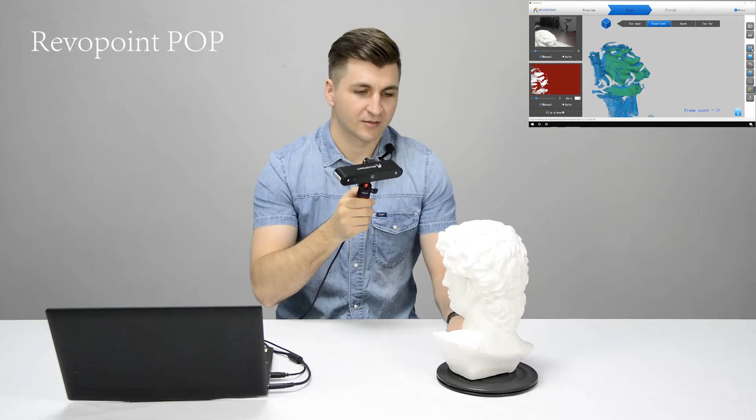So here now I will compare with the POP model from Revopoint, and I will show you how to use it. I find it very easy to use and work with this scanner, because all you need of course is the object and a turning table.

So you hold the scanner in your hands like this, not very close, not very far, just perfect, and you just turn it slowly, manually, and it will catch all the depths, all the edges of the object you need to scan. You can change angles, and also you can check with the computer how you're covering the object, how you scan it.

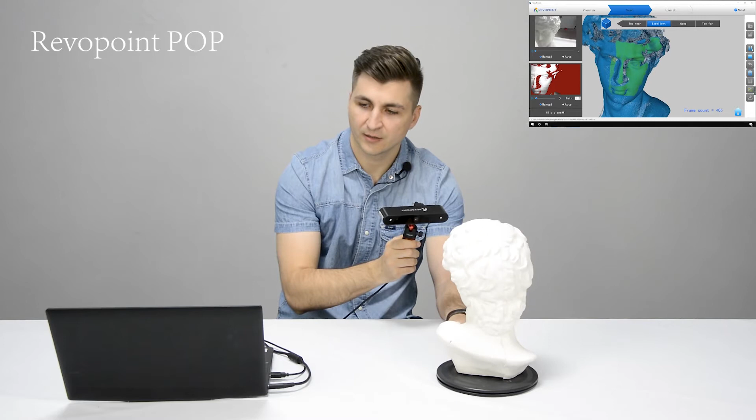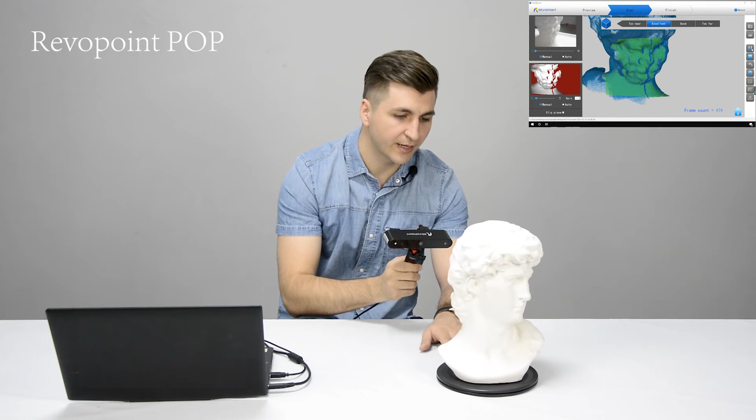And the depth of these scanners is very accurate and very precise. You can see very clearly how well-defined the scanning process is.

In the next part, I'll try to see how well each model can represent the details of my face better. So first, I try to use the Mark II scanner over here, to see how well the wide-angle 3D camera can identify facial features. For this, I couldn't do it myself, so I had to ask a friend to do the scanning for me, and I'll show you the results later.

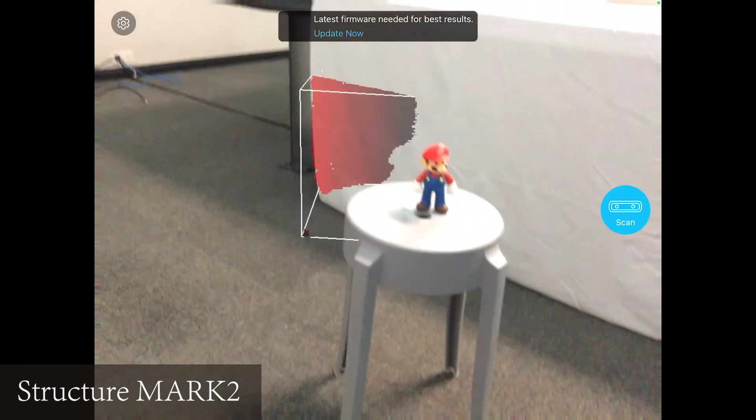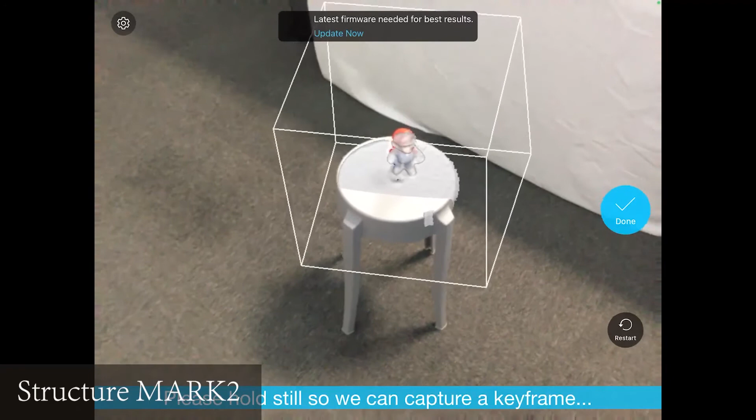Here I try to check the performance of these scanners by scanning a small object, in our case it's Mario. I just put the object on the chair and move around it. It identifies it, and yeah, we can see here the result is not very satisfying. The edges are not very clear, everything is quite soft and smooth.

Here I will show you how easy it is to scan a small object with the RevoPoint Pop 3D scanner. You just place the small object on the turning table and it will be done very soon.

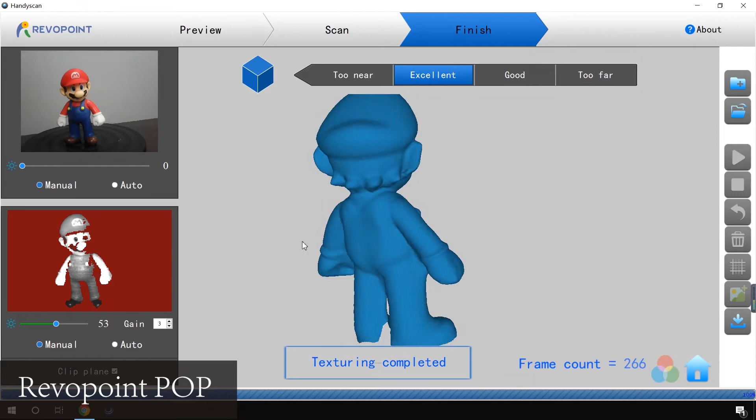For the fourth test, let's see how detailed these scanners can be. I have here a set of playing cards, each 0.25 millimeters thick. Let's find out if these scanners can identify the thickness of the cards placed on a flat surface.

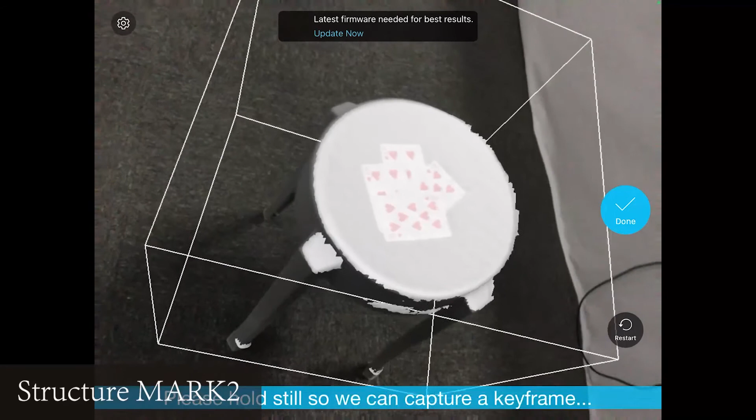Here I will show you how I scan the cards with the Mark II camera. You can see it identifies the object and it's locked, and now you move around it and it will scan. You can see it recognizes the colors, but it's not recognizing the different thickness of the cards on the flat surface. So we'll see how that goes for Pop from RevoPoint.

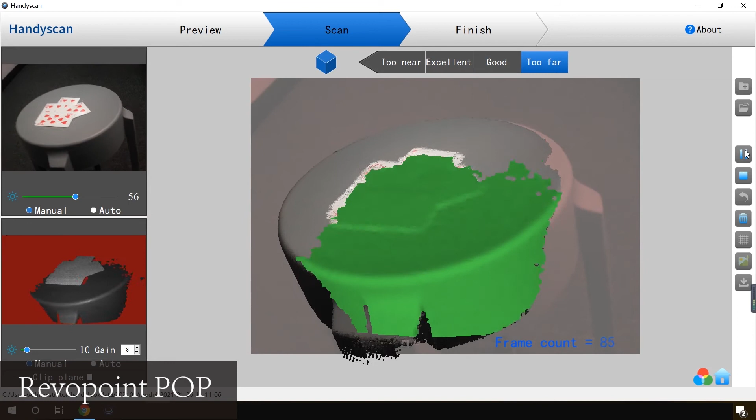Here I can show you how I scan the cards with the RevoPoint Pop 3D camera. You can see it's very easy to scan, you just hold the camera and move around.

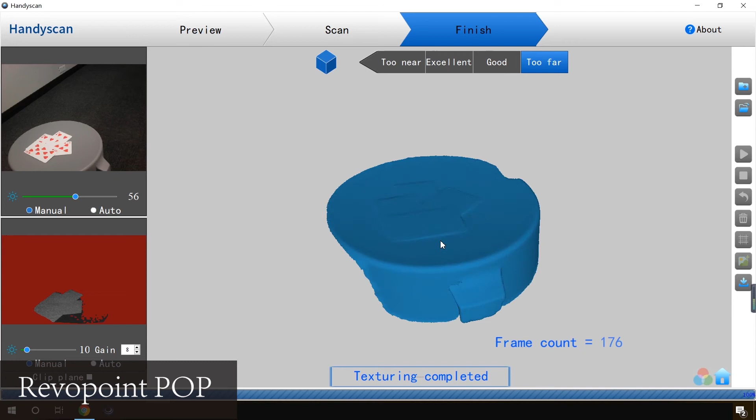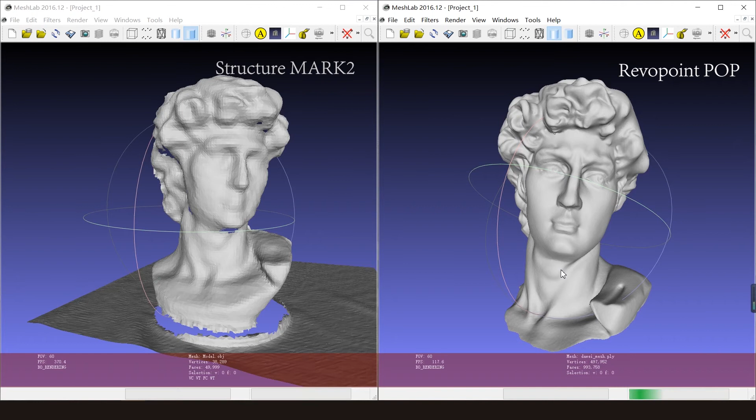So we got the results from both cameras. On the left we have the Mark II result, the 3D model realized with Mark II. We can see the surfaces are quite smooth and the edges are not clear, and you cannot even recognize the facial features. But here on the right we have the 3D model realized with the Pop 3D scanner. You can see very clearly the eyes, the mouth, the shadows, the depth of the object, which is very good.

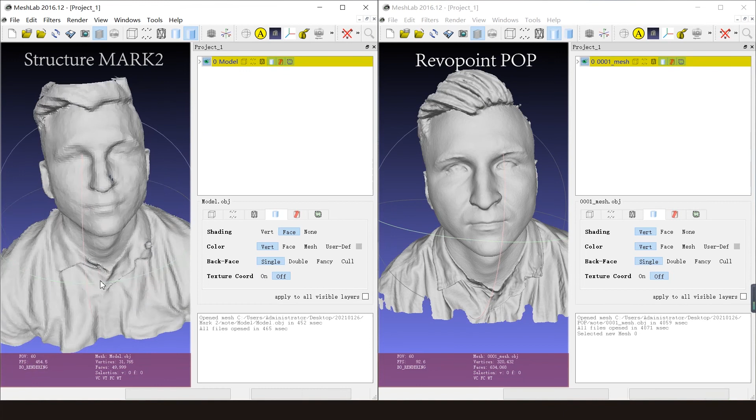We have here the results of the face scan experiment. On the left we have the Mark II. We can see the color is pretty good, and comparing with Pop it's not that bad. Both can recognize colors pretty well, but when we switch you can see the surfaces. The surface for the Mark II is not that clear, not that smooth, not that detailed, very rough surfaces.

Comparing with the Pop scanner, which can show much better facial features, you can see here the shirt or the eyes very clearly.

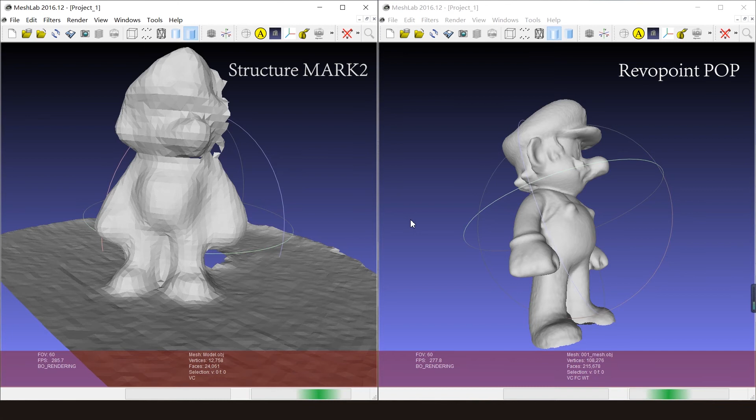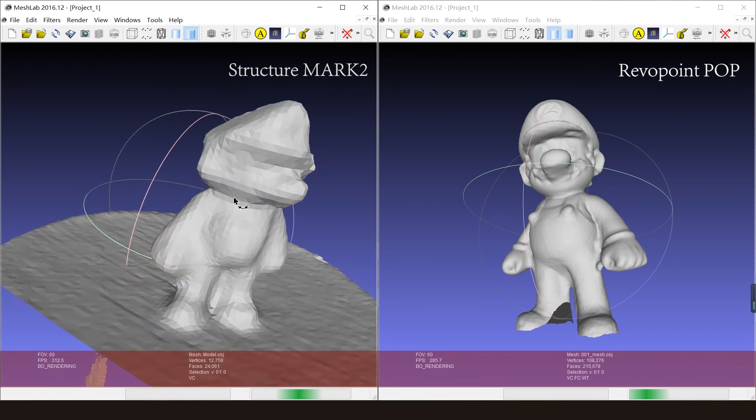So we have the results of the third experiment I did here, scanning a small object. On the right we have Mario, where you can see very clearly the edges and the features, we can easily recognize what is here. Comparing on the left side, the 3D model realized with Mark II, you cannot recognize what is the hair, where is the face, where is the nose, where are the eyes.

We have here the result of the experiment with the cards. We scan them and you can see quite clearly. Now I'll show you, when it's just about the surfaces, which scanner identifies the difference in thickness better. On the left side, Mark II, you cannot see clearly if the cards are there or not, only when we saw the color. On the right side, we can see clearly there are 4 cards there, which is very good.

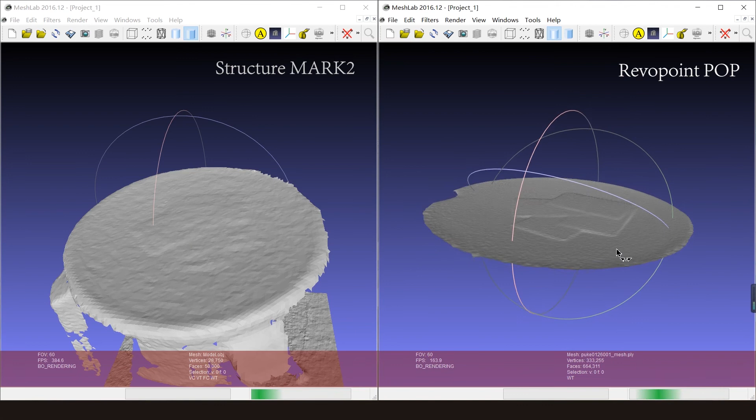I finished comparing these 3D scanners and now it's time to summarize. There are 4 main points I want to share with you. One is accuracy: the best choice by far is Pop from RevoPoint. Their scanner is much more accurate and the edges are quite sharp compared with the smooth surfaces of Mark II.

Second point I want to discuss is field of view. Mark II has a wider field of view, which is good for scanning larger objects that don't require high accuracy. Third, RevoPoint has very powerful software that's easy to use and has different scanning modes for different purposes.

And last thing, of course, is price. Mark II is $527 comparing with the Pop model, which is $499. But now with their Kickstarter campaign, they have huge discounts, so you can check their websites if you are interested.